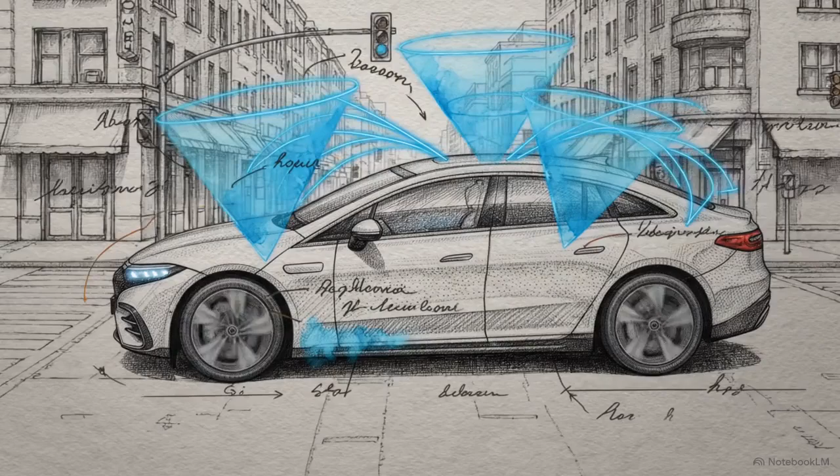Modern autonomous vehicles are complex cyber-physical systems, massive computer networks on wheels that must constantly translate digital code into physical action. To reach the road, these machines must satisfy two distinct regulatory masters: functional safety and cybersecurity.

These two disciplines have opposing needs. Functional safety relies on speed. If a pedestrian steps into the road, the car needs low-latency, immediate reactions to halt. Cybersecurity, however, requires the intentional friction of heavy encryption and data validation to ensure the car's signals haven't been tampered

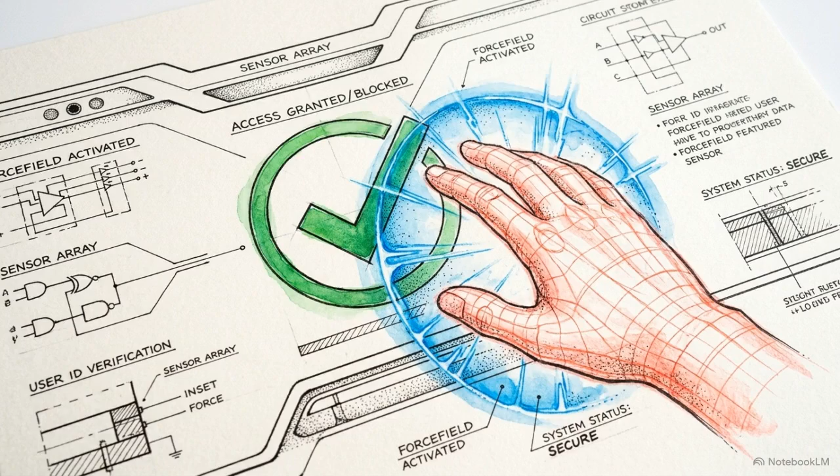with. This creates a paradox. Optimizing for safety can leave the car's network open to hackers, but optimizing for security adds processing delays that can make the car too slow to avoid a physical obstacle.

In many traditional automotive workflows, the safety and security teams work in isolated silos, rarely sharing a common data environment. Security teams often track their threat analysis and risk assessment, or TARA, in static, disconnected spreadsheets. Because these text documents cannot mathematically interact with physical design files, contradictions remain hidden. Engineering teams often fail to spot fatal design flaws until they build and test physical prototypes on a track.

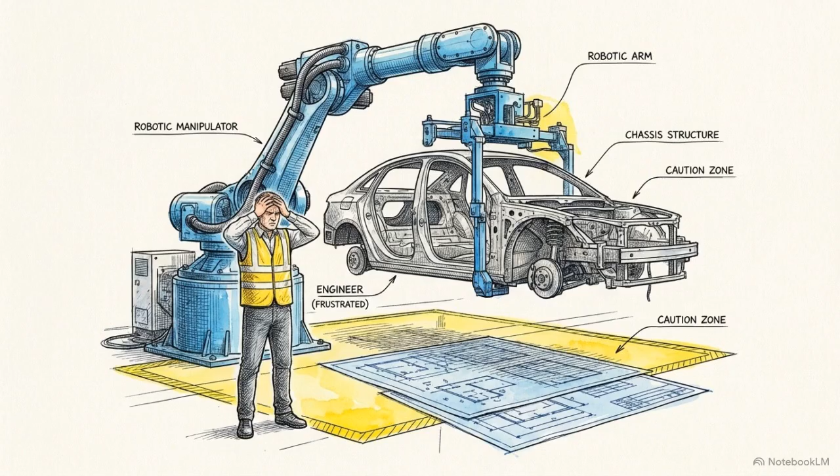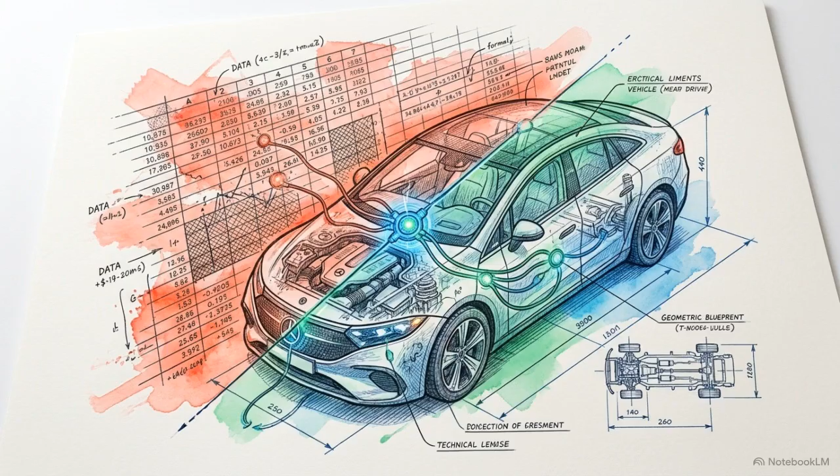Flat documents lack the structure to manage the multidimensional complexity of a modern vehicle. Relying on them leads to architectural blind spots and the massive financial waste of late-stage redesigns. Industry is shifting toward model-based systems engineering, or MBSE. At the center of this is SysML v2, a language that replaces disconnected spreadsheets with a unified mathematical architecture.

SysML v2 allows engineers to define cybersecurity threat models using textual notation. The system then instantly generates the corresponding visual blueprints, keeping the logic and the layout synchronized. This allows us to trace a specific security goal directly down through the architectural layers to the individual software components.

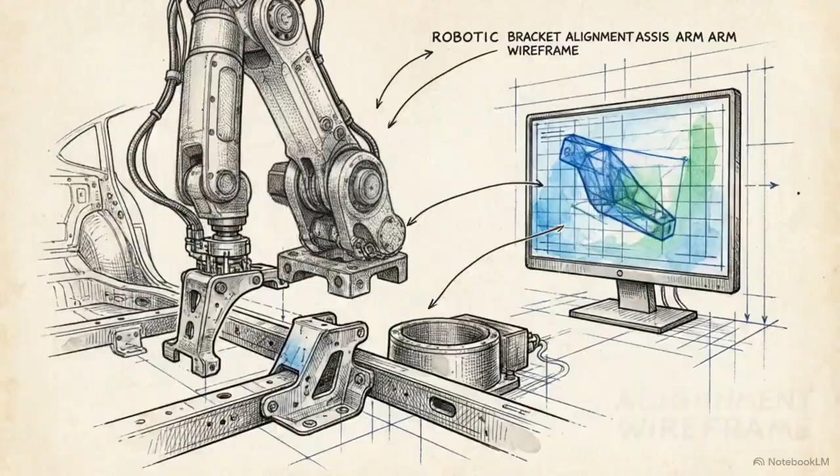Using the allocate function, this software logic is mathematically tied to a specific physical microchip, like a hardware security module. This mapping creates a true digital thread. If an engineer changes a microscopic hardware spec, the macroscopic regulatory models update automatically, ensuring that design stays consistent.

To see how this prevents failure, consider a vehicle that encounters an obstacle and must trigger its emergency braking. The functional safety requirement is rigid. The vehicle must detect the obstacle and halt within 100 milliseconds. Now we add the cybersecurity requirement. To ensure the stop signal isn't a hacker spoof, the over-the-air receiver mandates 50 milliseconds of encryption validation.

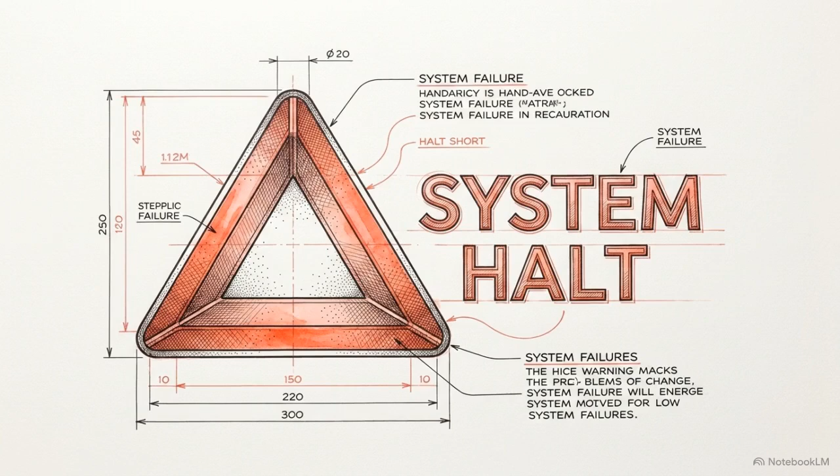Finally, we add the baseline system limits: 30 milliseconds of network latency plus 40 milliseconds of mechanical processing time. The total reaction time now hits 120 milliseconds. The math here reveals a serious crisis. By enforcing the new security rule, the car will now fail to stop in time, leading to a physical crash.

SysML v2 catches this during the design phase. The moment the 50 millisecond requirement is entered, the system's Assert constraint flags the timeline overlap and blocks the design. By acting as a mathematical referee, the language forces engineers to resolve the trade-off, perhaps by upgrading the processor, long

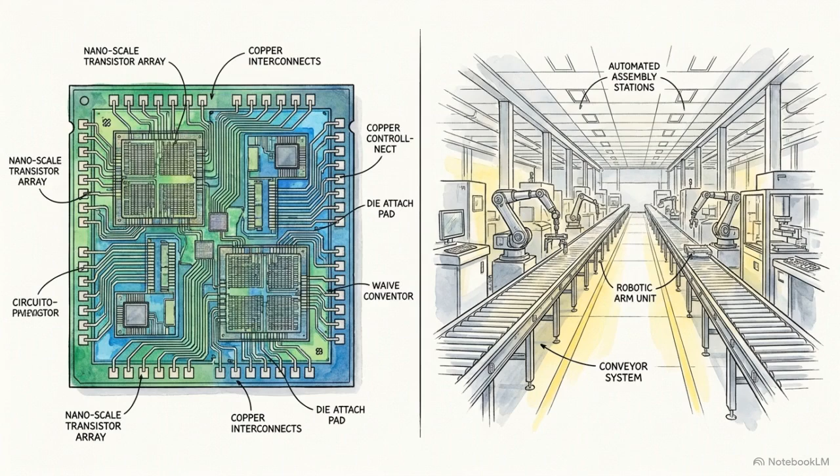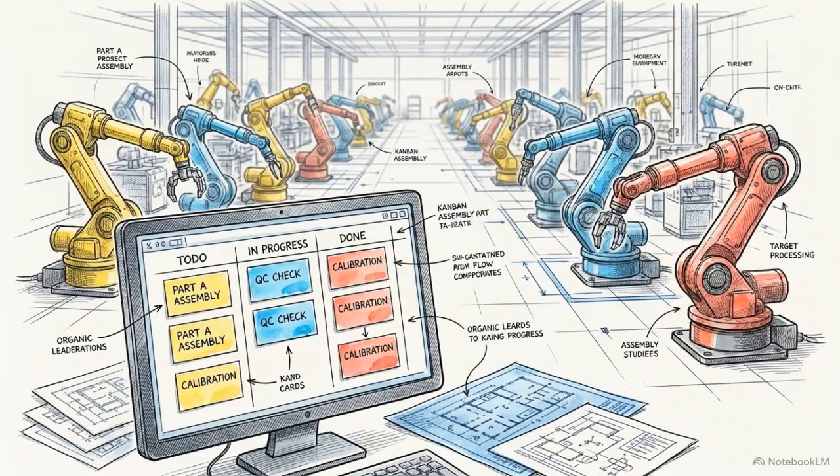before physical manufacturing begins. Engineering has evolved into a software-like discipline, where blueprints are no longer just drawn, but compiled using a system-as-code philosophy. This allows manufacturing teams to adopt agile DevOps pipelines. Teams use version control systems like Git to track and merge changes to physical car parts.

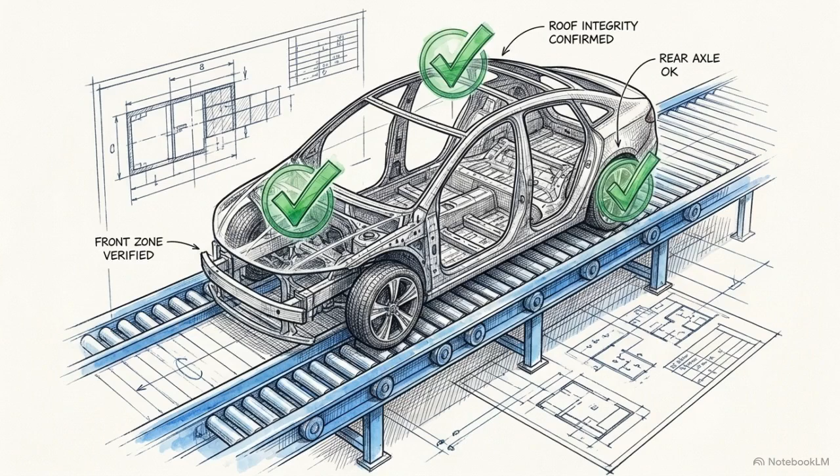Every time an engineer satisfies a design constraint, the toolchain logs a cryptographic signature. This hashes the model snapshot and the expert's approval into an unchangeable record. This creates a signed evidence chain. Regulators use this mathematical audit trail to verify that every safety and security requirement was met by the design before the car ever hits the assembly line.

In a world of connected automation, the boundary between digital security and physical safety has vanished. Protecting human life requires an engineering language built to mathematically resolve paradoxes, rather than just documenting them in a file. SysML v2 moves the industry away from reacting to flaws. It allows us to actively compile a future that is truly secure by design.